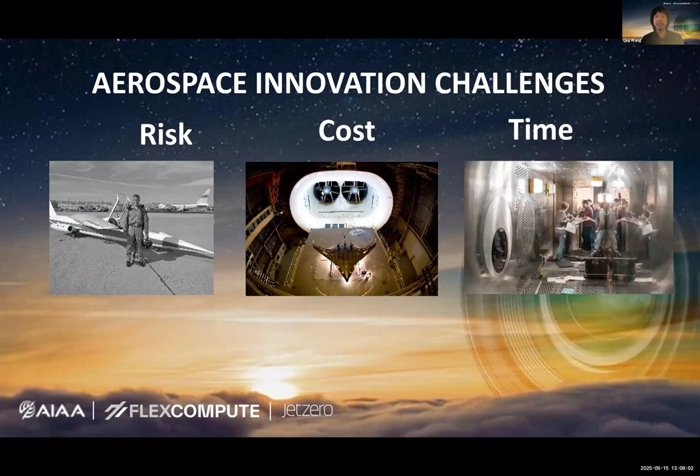The reason I figured was that aerospace innovation is really challenging. It is very risky. I mean, a lot of very good people lost their lives testing innovative airplanes. Innovation costs a lot of money, and those working on hardware understand that innovation in the aerospace industry just takes an enormous amount of time. And the dream here at Flexcompute is really to deal with risk, cost, and time in aerospace engineering. And the dream is to make aerospace innovation as easy as software innovation.

So here, I'm just going to be using the example of our collaboration with JetZero to illustrate what we are doing to try to make aerospace innovation as easy as software. For example, a lot of innovation has huge advantages, but also has risks to address. And what JetZero is doing, putting the engine at the back of the fuselage, has enormous advantages, but there are also questions to be answered, especially of airframe engine interaction. So is the engine ingesting separated flows at high angle of attack, and when would that happen? And how about crosswind takeoff? What is going to be the interaction with the boundary layer at the back of the fuselage?

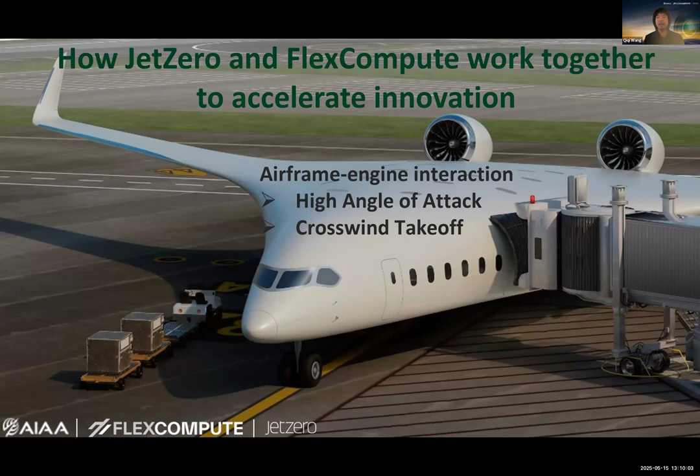So again, this highlights what we do at Flexcompute, using the most innovative GPU technology to de-risk innovation. And as a result, accelerate design iterations of the methods of dealing with potential risks of innovative designs. And as a result of these fast design iterations, optimize the cost efficiency towards net zero. We're in a unique position to reduce the carbon emission of the product you design yourself and during the design process of running the simulations.

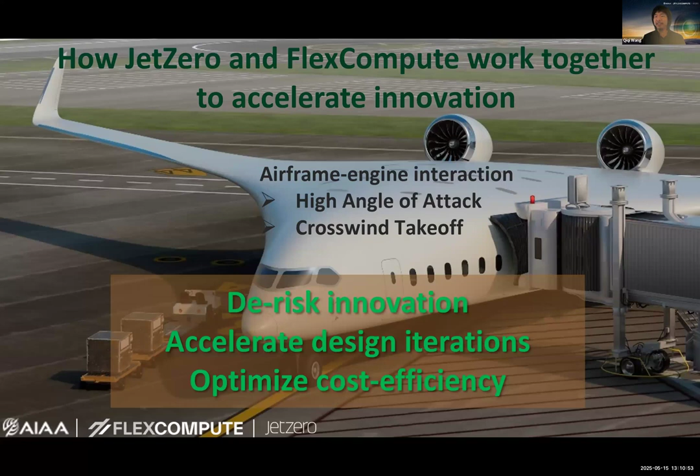So let's first get into airframe engine interaction at high angle of attack. So this is something John Vassberg just had a phone conversation with me about one night, and we just figured, how about we run a fully unsteady simulation like this. Really, virtually inside our CFD simulation, test fly a 1/16 scale test vehicle as it pitches up, starting from a low angle of attack to high and higher angle of attack.

And the same for the next work, which is the engine installation effect at crosswind takeoff condition. So this is another simulation done by Thomas, simulating how the engine operates when sitting on the ground, which means there is no forward speed of the engine, but there is wind, there is high crosswind coming from the side, and the engine operates at takeoff thrust conditions.

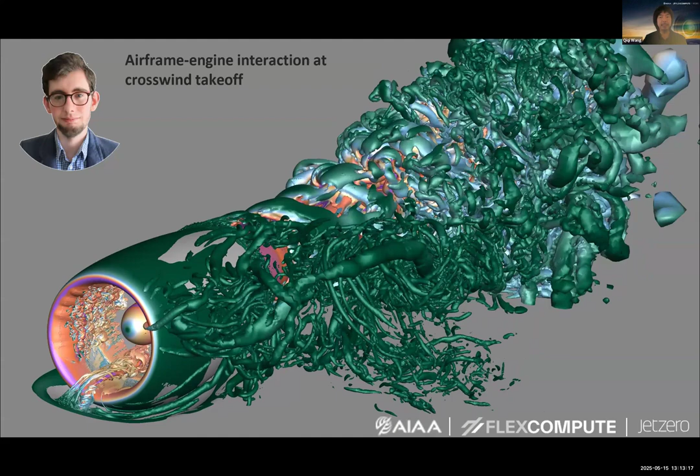What you see here is that there is a simulated back of the fuselage of the JetZero airplane beneath the engine. And because there is crosswind, the boundary layer, the vorticity in the boundary layer, gets sucked into the engine. And this creates a very challenging phenomenon for the fan face to deal with. This, combined with the separation on the windward side of the nacelle inlet, creates non-uniform total pressure at the fan face that needs to be endured or designed away by the engine.

And we here have a more zoomed in view of what is happening. As you can see, there is still one strong vortex at the center. If you look very carefully at the purple vortex, it's a very strong vortex that gets sucked into the engine, and that vortex also dances around. Around these very strong vortices, there is also a system of weaker vortices that also gets swirled into the jet

engine. And doing this kind of simulation helps us quantify exactly how big the potential problem is, and very quickly design our system away from any problem that might be harmful. And having a GPU-native simulation, sorry? Qiqi, do you mind if I interject a couple things here?

Of course, go ahead. Yes, so what we saw in the previous animation with the aircraft, that was our 1/16 scale low Reynolds number vehicle. The airfoil stack on that is nothing similar to what we're actually flying for the full-scale demonstrator. But we have this opportunity to look at the flow separation patterns, and we'll be using this model to test out vortex generator patterns as well as vortilons to figure out how to control our stall characteristics and post-stall characteristics.

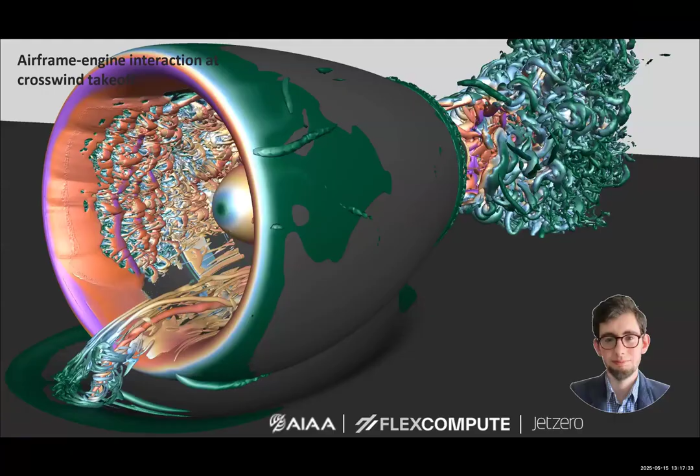Qiqi, are you available to take a few questions at this point? Yes, please. Okay. There is one question here. Are the engines' centerline parallel to the aircraft centerline or offset by a small angle? I guess that would really be a question for me. The engines that you're seeing in this 1/16 scale model are parallel, but that isn't to say that the real airplane will be. Yeah, thank you, John.

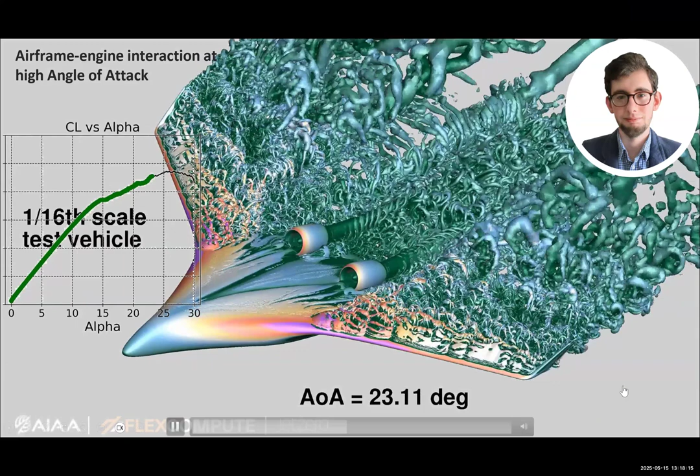Certainly. These questions may not necessarily be in order, so I apologize for that. But one individual is asking max separated flow is. So it sounds as though they would like an explanation on max separated flow. Max, I'm not sure what you're referring to. Yeah, it's somewhat cryptic in the Q&A. So I would invite the individual that posted this to resubmit, and then we will attempt to answer that live for you. So thank you.

The next question is, is your CFD GPU-optimized code open source? It is not. Understood. Do you want to go into any explanation, Qiqi, on why you are keeping that closed? Is it related to trade secrets and that kind of thing, just to give a little context to your response? Yeah, basically that allows us to provide the best service to our customers, such as JetZero. Absolutely. Thank you.

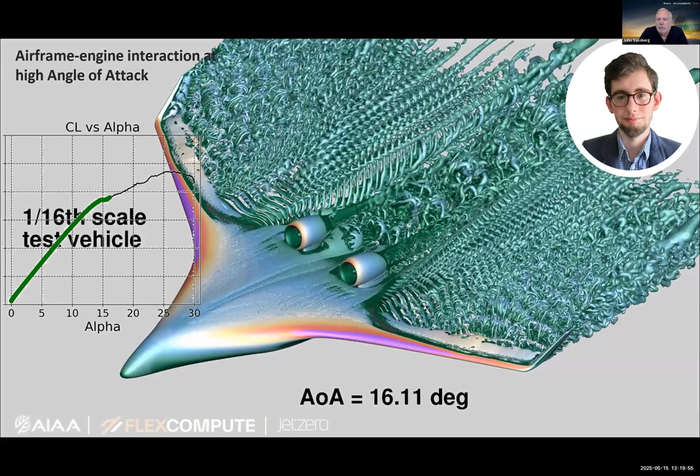Next question is, we recently witnessed a commercial airline crash in a flat spin, uncontrolled descent. What characteristics of this blended wing design might promote this tendency? Well, let's see. I don't want to speculate on what happened with the other incident, but we have to certify this airplane just like we would certify any other conventional transonic transport. So there are no rule changes that we're requesting from the FAA. The regulations are the same. We will design and have to certify to those same regs.

Our airplane, well, I will not put my name on an airplane that's not safe to fly. So we're working those issues. And I guess what I would also like to say is that we have these flying test beds so that we can go, like in this particular case, the separation here starts out at the wingtip and moves inward, whereas on our full-scale high Reynolds number vehicle, flight Reynolds number vehicle, we've tailored the separation to start more inboard, just like we would on any other conventional wing.

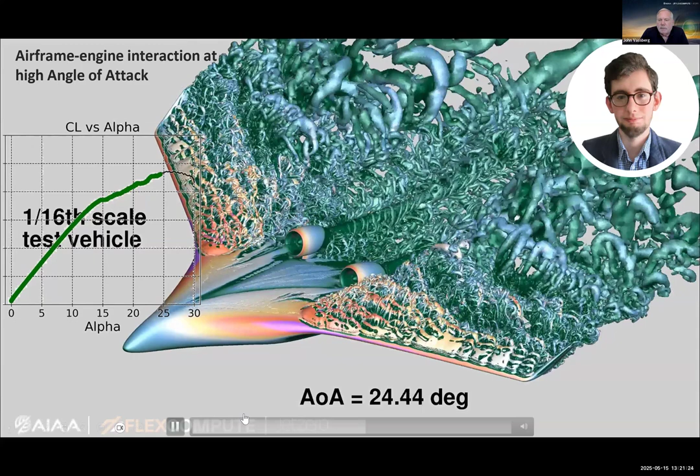I really don't know much more to say on that, other than there's a bunch of us working here at JetZero that have many decades of experience, and we're very much aware of what we need to do to get this aircraft certified. Absolutely, John, thank you for that. We know that safety is priority number one. Yes, across the board, and we appreciate and know that you all are supporting that for the industry.

I'd also want to add that a lot of the simulation and analysis, the de-risking Flexcompute helps our customers do, is related to safety. We have other customers, for example, concerned about the landing of their aircraft. What we do is actually fly through an entire landing process in simulation at various windy conditions, and that helps you de-risk potentially safety problems. Yeah, this helps innovation a lot.

Outstanding, thank you. I'll add one more thing: in any kind of aircraft development program, we have to collect tens of thousands of data points throughout the flight envelope. At JetZero, we're leaning heavily on numerical methods. We will still have wind tunnel tests. In fact, we're going into our low-speed wind tunnel test in just a few weeks. Our high speed test will be later next year.

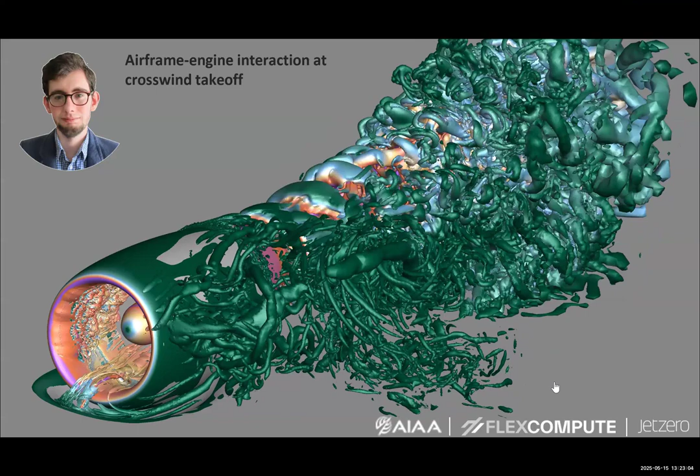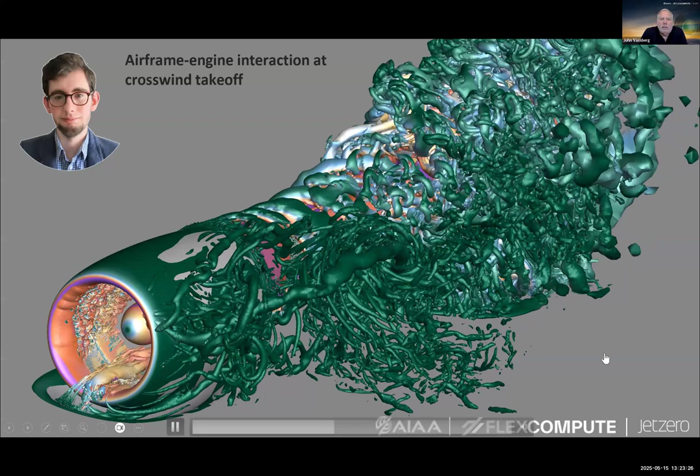With Flexcompute and GPU enabled, it allows us, even in the early development stages of a product, to run thousands of points. We don't necessarily need to run the 10,000 or more set of points for the final aircraft, but understanding where we need to study the problem in our early design stages really helps us avoid having any of these surprises.

We certainly don't want to be surprised when we get into flight tests. Nobody does. So what we're doing a little bit different here at JetZero is leaning real heavily on the numerical methods, the accuracy of the numerical methods, and the cost effectiveness of the numerical methods. That's why we partnered up and are collaborating with Flexcompute to bring that capability to the design environment here at JetZero.

Excellent, thank you. Chi-Chi, did you have something else to support that?

Yeah, I was just trying to say, not only does this minimize the surprises you have in test flight, but also minimizing how many surprises you have in the wind tunnel test is useful, because wind tunnel tests are expensive. If you minimize the surprises, it reduces how often you have to go back to a wind tunnel to have more complete data.

So Chi-Chi, we do have this list of questions that we had worked on together. Shall I start with those and go ahead and work through them? Sure. Okay, for Chi-Chi: legacy CFD tools are slow, sure, but is the industry really ready to abandon decades of entrenched infrastructure for GPU native tools like Flow360?

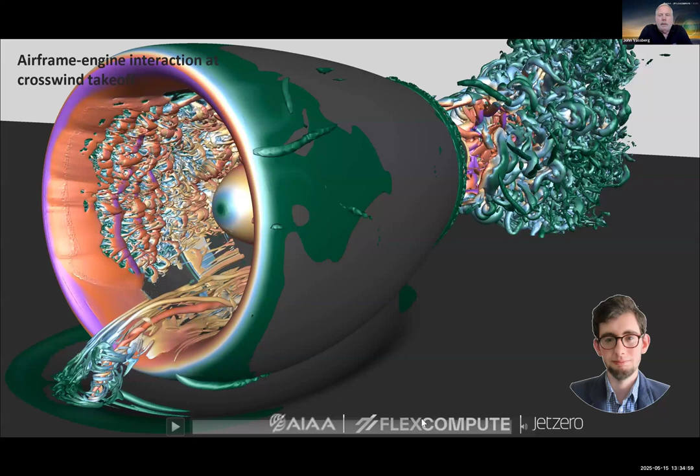Well, I'll tell you, Chi-Chi, while you were going through that, I was thinking back on the solutions that we did show. I do want to point out that the cases we are showing are extreme cases. If we showed the in-flight conditions, it'd be boring. There'd be none of this turbulence and stuff going on.

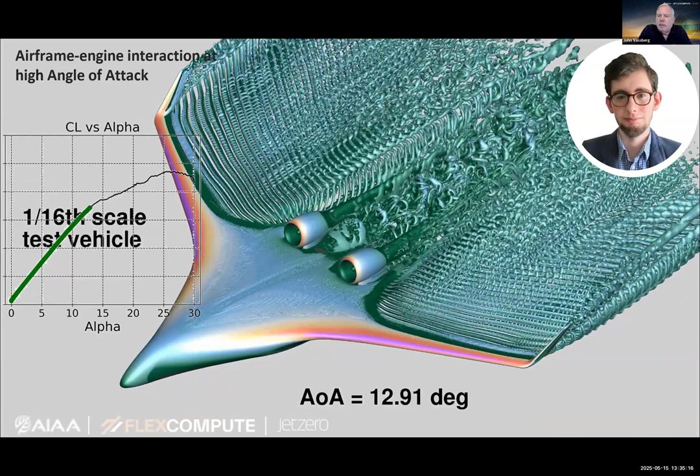For example, on the propulsion airframe, well, the ingested vortex from the other video. Yeah, this one. We're sitting on the ground, zero speed forward, waiting to take off on our takeoff roll, and we have a large crosswind coming directly 90 degrees from the side of the airplane.

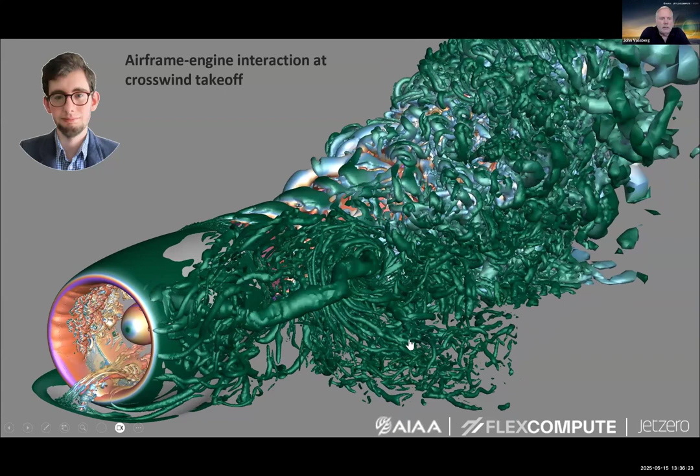Even at these conditions, once we start rolling, I've mitigated the vortex ingestion, but once we start rolling, we shed that ingestion into the engine before we rotate. When we rotate, this engine is at full max takeoff thrust, drawing as much air into the inlet as possible. We are working the propulsion airframe integration in such a manner that even at that rotation point, which is the most difficult point for keeping the aircraft's boundary layer out of the inlet, we're working to keep the distortion at the fan basically zero distortion.

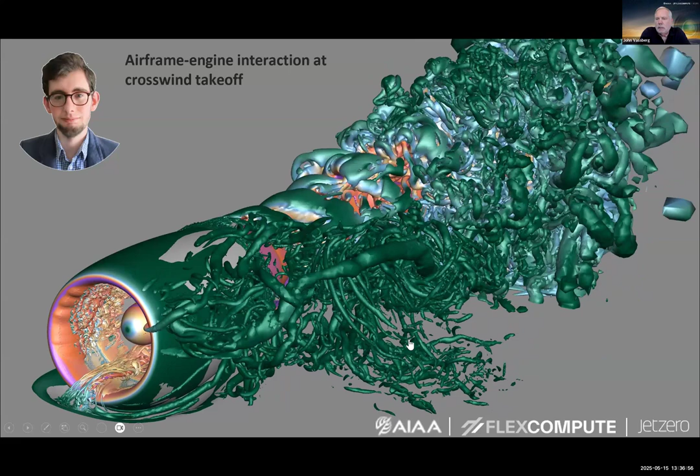In fact, we're able to get to points where the distortion at the fan face, or the aerodynamic interface plane, is less than what a conventional airplane gets with an over-rotation with an engine hanging under the wing. That isn't so much because we're better designers, it's just that the situation with this installation is different. The airframe itself is actually a big turning vane, so that inlet sees basically the same condition whether we're at 2 degrees angle of attack or 10, and whether we're at 2/10 Mach number or basically cruise. So the conditions at the engine are a little bit different, but

in some sense that is an easier problem than on a conventional aircraft. What we're doing here with this semi-buried engine makes it very difficult. It's as difficult as some of the aircraft out there that have very close-coupled engine-to-wing installations. This is very similar in that respect.

But we have the confidence with the CFD, the methods we're using, the rigor we put into mesh quality, the rigor we put into mesh sensitivity studies. A lot of this is stuff we've been trying to teach through the Drag Prediction Workshop series and High Lift Prediction Workshop series at AIAA - I was part of starting that in the year 2000. So here we are, 2025, 25 years later, still learning, but we have a wealth of information and understanding and experience on how to deal with these tough problems and tame them with innovation and intellectual property unique to this airplane over the others.

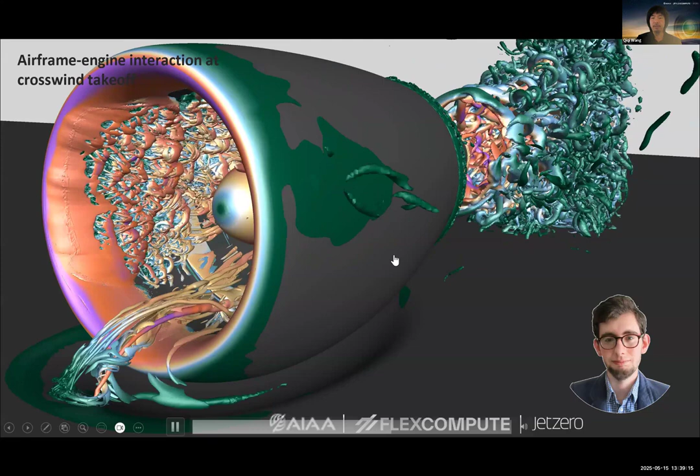Excellent. So Qiqi, what's the benefit of GPU technology and advantages on hardware cost?

Oh yeah, we actually started our GPU code almost 10 years ago, exactly because we figured out back then that using GPU on industry-standard flow simulations, unstructured flow simulations, is not just faster but also cheaper. All the previous literature we saw said it can be faster, but it was not clear it's going to be cheaper. That's what we figured out 10 years ago, which made us jump into developing a GPU native code from scratch, that's going to be much better, not just in speed and scalability, but also in cost. So right now, today, our GPU native code has a cost that's actually much lower than traditional options - even if you take free software like Fun3D and run it on your own cluster, the cost you're going to have is going to be more than using our software.